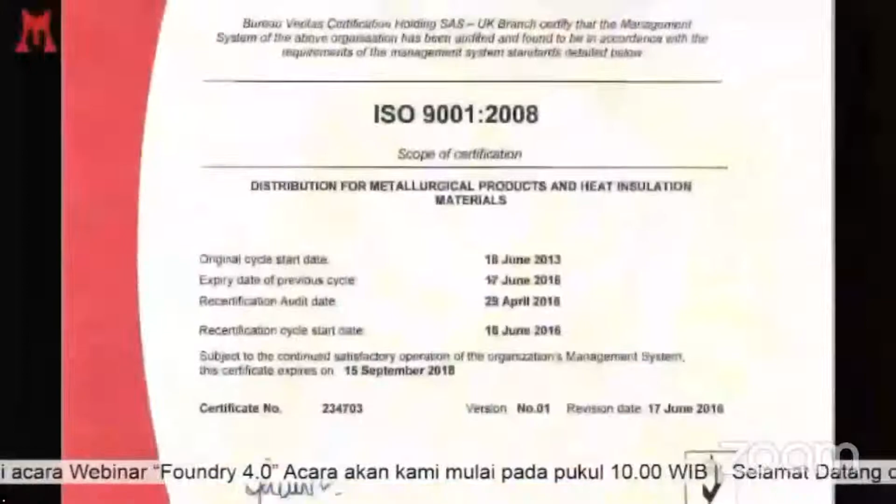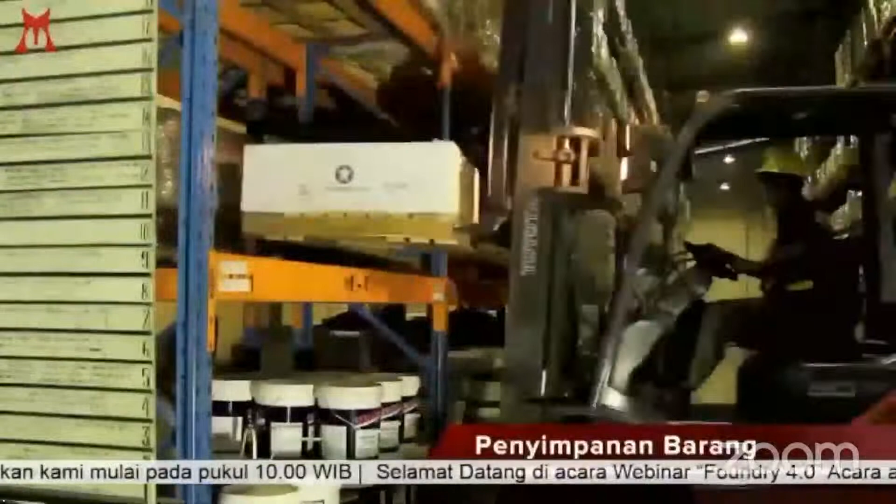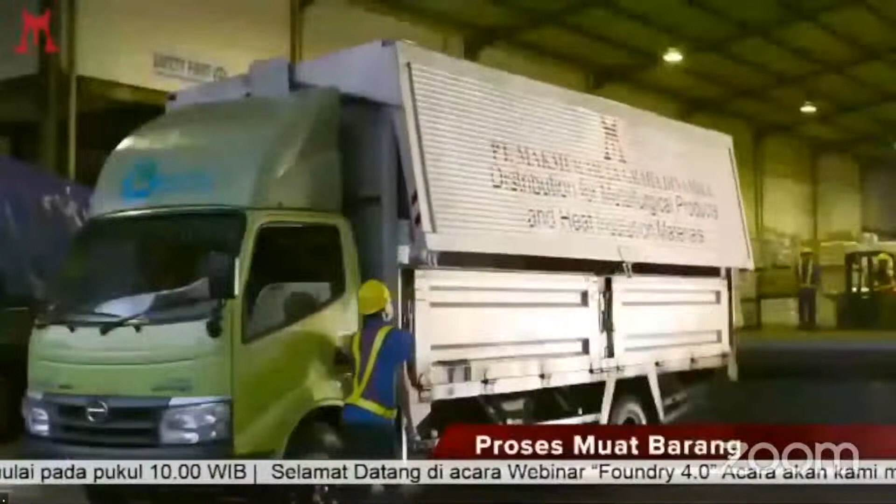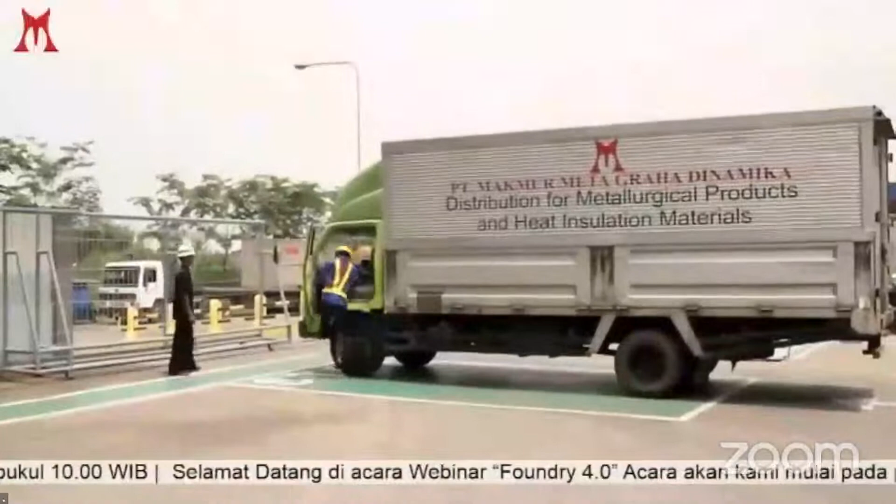PT Makmur Meta Graha Dinamika adalah perusahaan distribusi produk-produk metalurgi dan material tahan panas terkemuka di Indonesia. Sistem manajemen logistik terintegrasi untuk menjamin pelayanan terbaik kepada pelanggan. Kami selalu siap menjaga kepercayaan Anda.

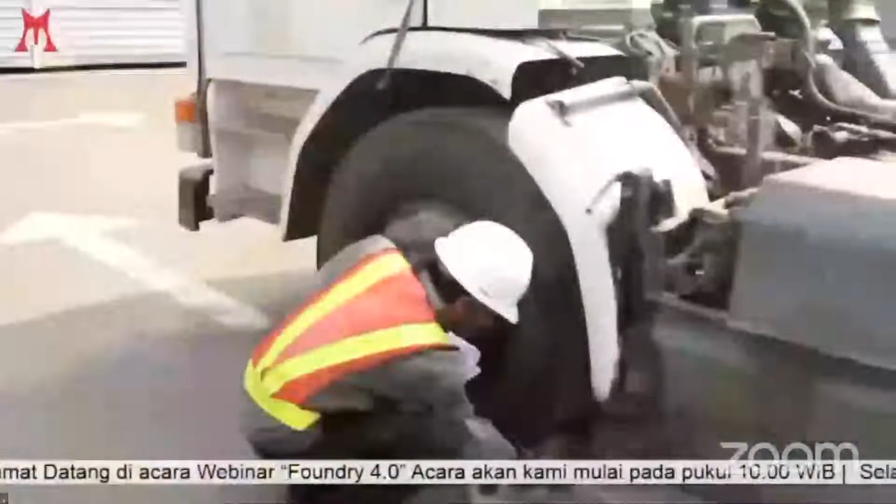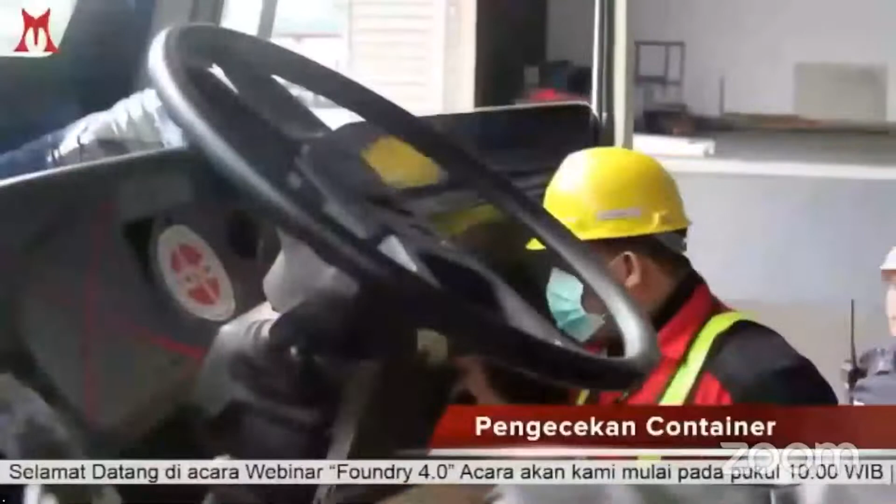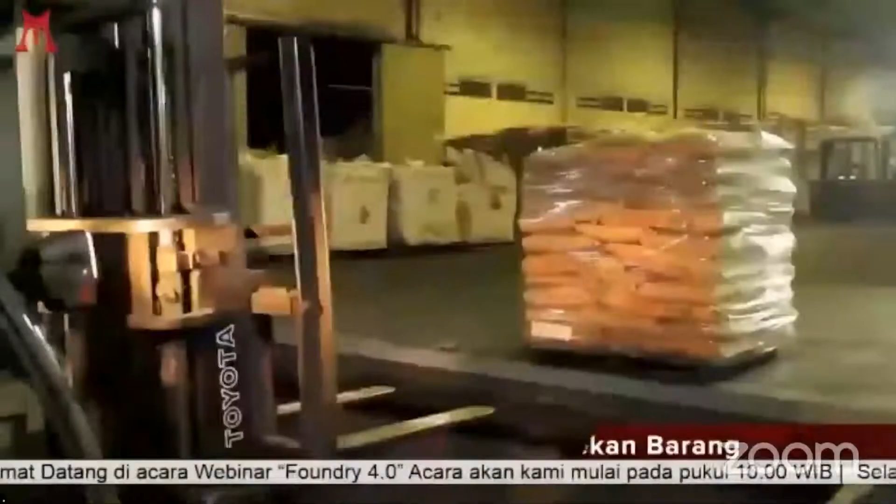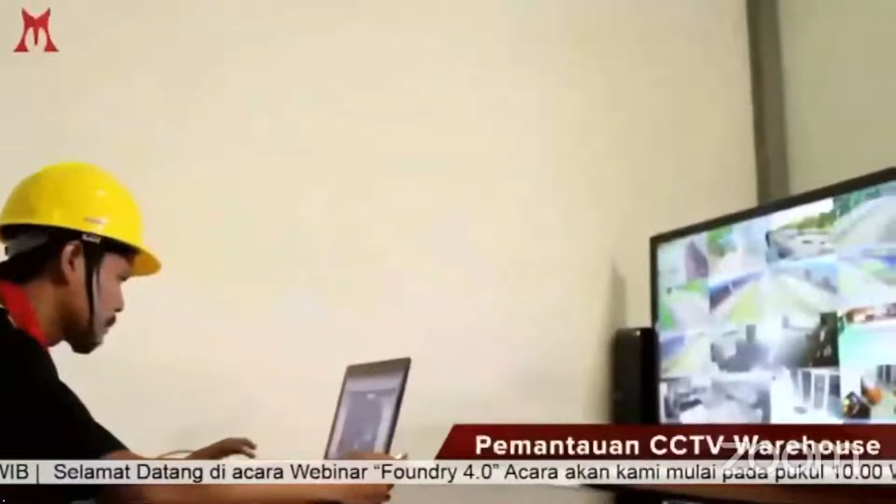Makmur Meta Graha Dinamika adalah perusahaan distribusi produk-produk metalurgi dan material tahan panas terkemuka di Indonesia. Sistem manajemen logistik terintegrasi untuk menjamin pelayanan terbaik kepada pelanggan. Kami selalu siap menjaga kepercayaan Anda.

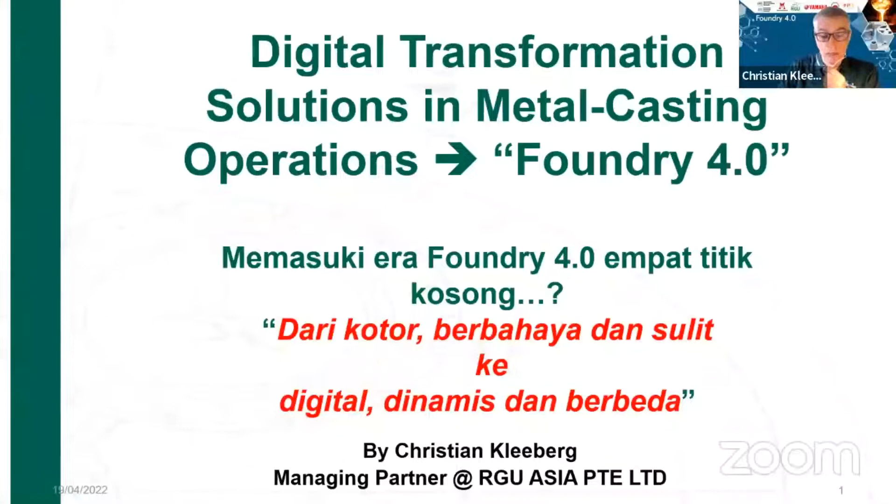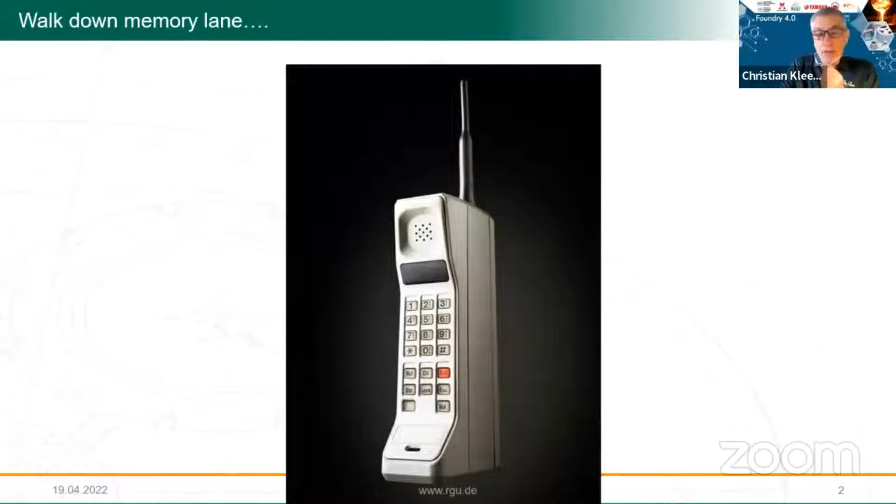It has to do with a very important keyword: innovation.

And innovation means also in Foundry what we are talking about on 4.0. Now, the topic of today was metal casting 4.0 innovation via digitalization. And it's extremely important that I'm in a position to show you what is that, why should I do this, how do I do it, when and where do I start, who can help, what misconceptions prevail.

A quick one about myself, Christian Kleeberg. I'm 58, married, have 2 children. I'm since 2015-16 independent expert in digital transformation, have more than 27 years of experience in this one. We have our own company and we are the exclusive digital solution provider only for Foundry. So we really focus on this area very much exclusively.

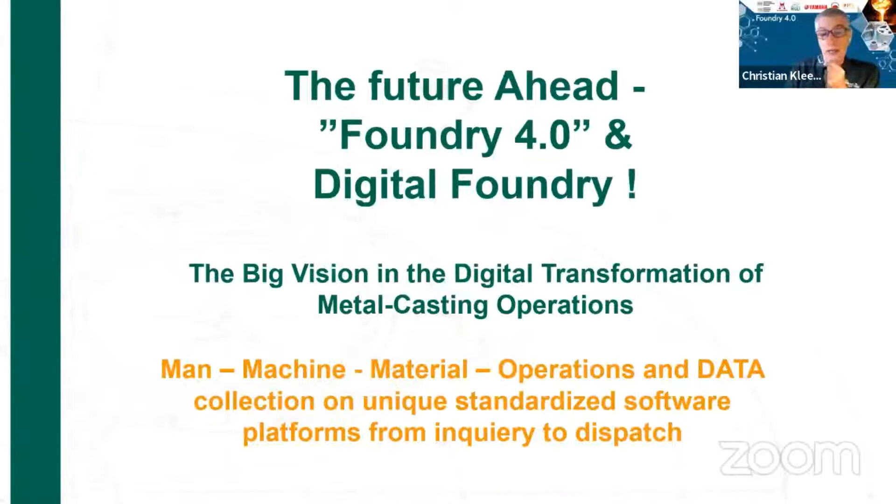Now, let us go now into the metal casting industry, understanding what Foundry 4.0 actually means, digital foundry, what's the vision, how do we bring man, machine, material, operations, and data into standardized software platforms, and how do we look at it from a holistic point of view. So it's about understanding 4.0 for metal casting operations.

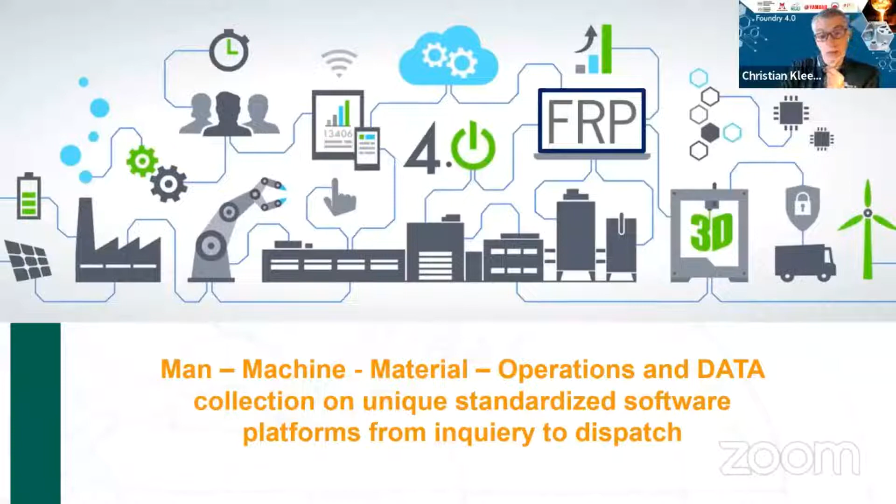Yeah, a quick one about our company actually. RGU Asia Pacific is operating since January 2017, and we have become the leading supplier of digital solutions for metal casting operations for foundry, but also for heat treatment and steel mills and aluminium smelters. And we are a joint venture between the RGU Germany and our Singapore organization. And we have our own company in India itself. And we have about 85 specialists globally and more than 320 installations and projects done already. And we have distinguished partners, especially in Indonesia, Makmur Meta Graha Dinamika.

Pak Andre will be happy to support you. Many customers of ours, from very, very small to very, very large.

So it's not about the size that matters, it's about a digital mindset that matters. And let me explain why. We have in Asia Pacific, since January 2017, already acquired 18 clients. And that's a very good success rate, I must say, because it takes time to implement technology on the 4.0 level.

As I mentioned earlier, digital solutions for the heavy industry: casting, forging, steel mills. It's about production, it's about planning, it's about controlling, it's about sourcing, it's about big data. And it's about understanding how new technologies on the 4.0 level can be integrated in an environment that can be hostile. That's the major objective we have to understand, and that's what we're going to talk about today.

Because we will have a lot of challenges to overcome, and these challenges are actually difficulty in extracting and transferring the data onto one platform. The challenges are integration of hardware and software between different suppliers. The challenges are the rise of cyber threats, for example ransomware attacks—it's happening already. The challenges are the speed of how new technologies are emerging. And the challenges are the lack of knowledge of standards.

Let me explain what it actually means between digitization, digitalization, and digital transformation. So digitization is a very simple thing: you change from paper fax to email. Most of you have done that already.

Digitalization means you're using new technologies in a business model, and of course you do things in a different way—for example, digital sourcing or buying. And digital transformation means you are using complete technologies to change your organization, and of course you ban certain things, for example no more Excel files. And that's actually the most difficult thing when you want to change the organizational model.

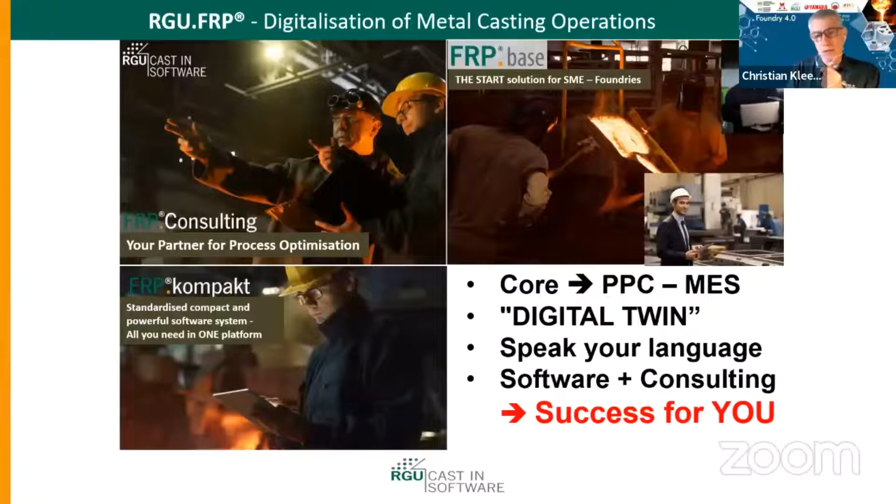Now, another technology—and we'll come back to that one a little bit later—is about our melting shop solution. The melting shop, in any environment we are talking about, foundry, steel, smelters, even heat treatment, is the area where the biggest cost driver is. So the question is always, how can we digitalize that one? Is it possible? Yes, it is possible. And you won't believe how much potential savings are available in that particular area.

Now, having said about digital twin, what is a digital twin when you apply that in a metal casting environment? The digital twin, as per definition, is a virtual representation that serves as the real-time digital counterpart of a physical object or process. Now in metal casting, this is the process from core, mold, melt, pouring, shake out, fettling, machining, heat treatment, packing, until you send out the parts via dispatch.

And of course, there are variations—different processes mean different areas. And all these things can be digitally replicated. We call that a resource plan inside our bespoke FRP software platform.

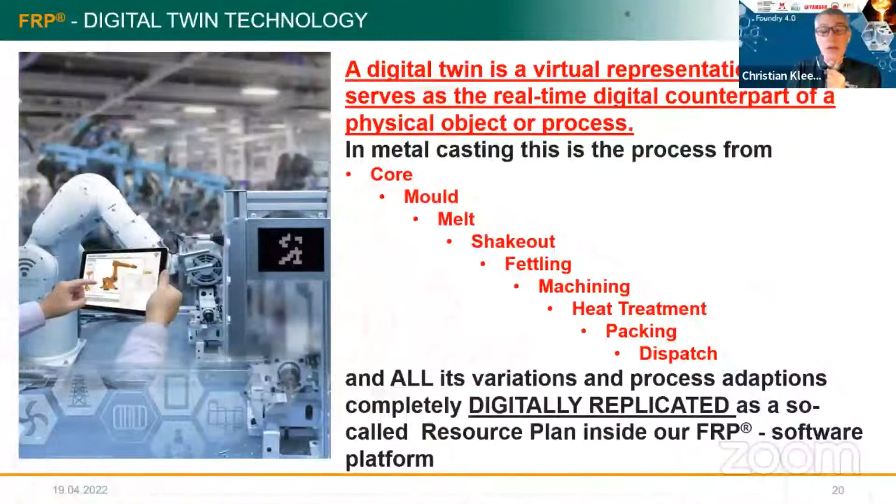When we can establish this information, we can use it for lots of good things inside an organization, and we can make things transparent. Now, what is a resource plan? It's a combination of a lot of items - the item master, the tools and patterns utilized, the operations, the BOMs, and ultimately, as a byproduct, the understanding of how much it costs to make a part. And that is a very important aspect. This resource plan technology, this digital twin technology, is applicable throughout the whole operation of a metal casting environment.

We of course use this information especially for the visualization of KPIs. And this is something I must admit I don't see much in foundries today. Foundries do not think about their KPIs. They do not see what happens in the near future, in the next 2, 3, 5 weeks. There's technology available that allows them to see these items and move to the future - for example, understanding 3 weeks down the road, do I have a problem in my fettling shop? Yes or no? Do I have enough resources? Is my capacity overutilized? So understanding these areas means better planning, better optimization, cost savings, higher productivity. And if we deploy such technology, we are on the well-known track of becoming 4.0. It's really one facet of many facets.

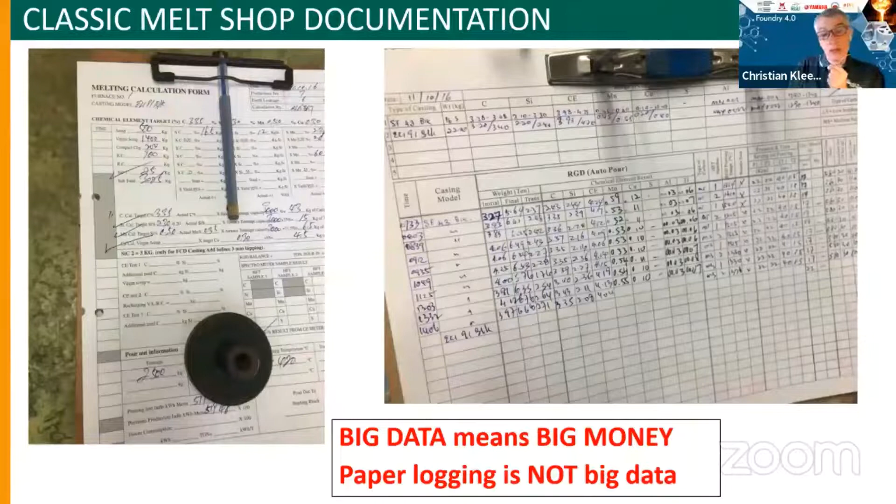How do we change this towards a digital operation? That is something I would love the most. 'We have an ERP system, means we are digital' - that's, in my view, the number one classic misconception.

Shop floor is many times neglected. There's no integration done. What you cannot measure, you cannot control - very simple. And if Excel prevails, you are just not digital at all. Period. Live with it. That's what we have to really learn about.

Now understanding this means understanding workflows. Workflows means you have sales offer, we have a resource plan, we need cost calculation, we have tool and pattern management, we need to book orders, we do production scheduling, we need to understand from the shop floor what happens. Ultimately we need to display the data, we do quality tests, shipping orders, invoices, and certificates until we ship the item.

And understanding this means we understand the company processes, we understand the feedback stations, we understand what overview is required. We want to make the foundry and metal casting environment systematic and ultimately resulting in better quality at work and business. So this is very, very important, because without that one, we are not able to structure the Foundry 4.0 activities.

Now a foundry may look like this. For example, you have a molding line, you have a melt shop, you have a pattern area, you have a core shop, and there may be some other subsequent machining and cleaning and heat treatment and packaging and dispatch activities.

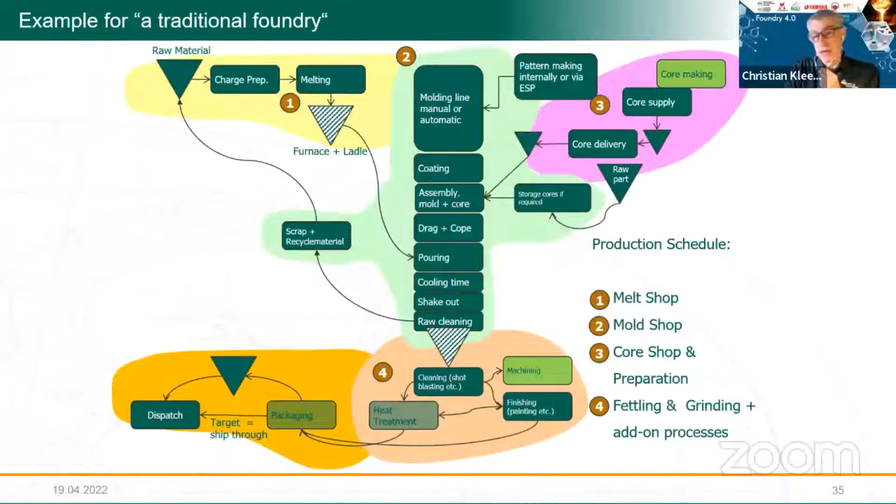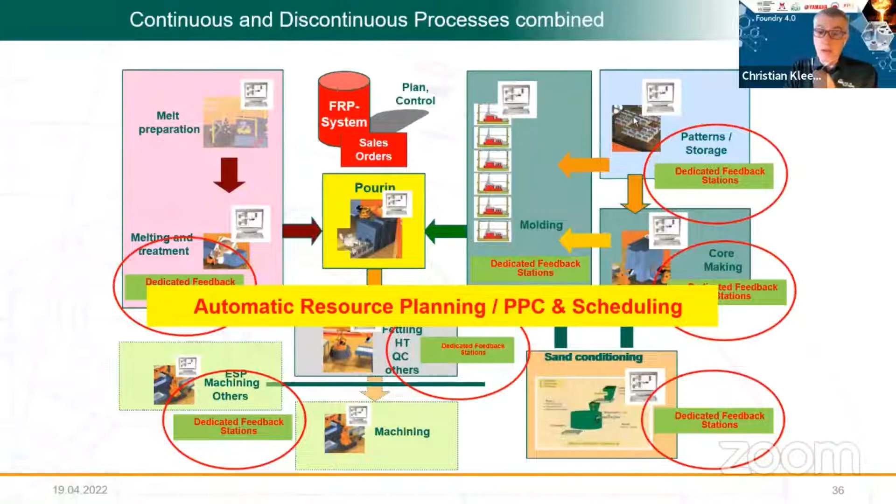Now a foundry can also look like this, structured with a computer in every area where there are what we call dedicated feedback stations. These dedicated feedback stations in a computer are then centrally serving the ERP system. We do an automatic resource planning, which means digital twin deployment and PPC and scheduling, and everything is fully integrated. It is possible, and I will show you in a few examples how it is possible.

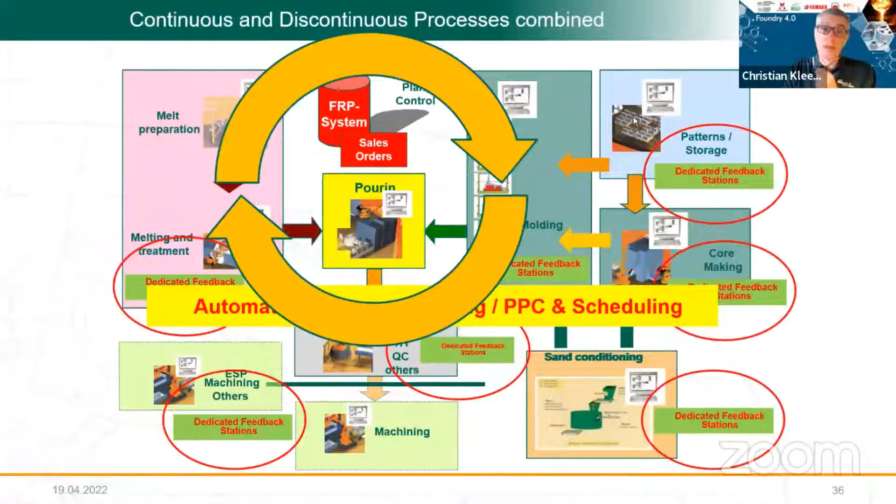Now let's look into these examples right away: digitalization, integration, and automation. I mentioned that already. What is it? Where do I start? What can I do? And why should I do it? That's maybe the even more important question - why should we do that?

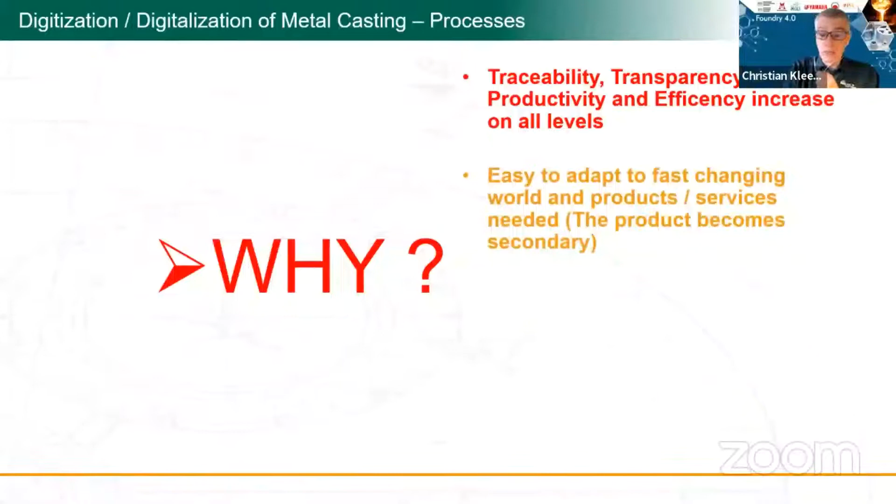Number one, we talk about traceability, transparency, productivity, and efficiency. We need to increase that. We talk about easy to adapt, fast changing world - the IT world is changing almost daily. We need, of course, to look into the profit margins when costings are involved. And we have to stay competitive with less waste. So that's a major reason why this is such an important topic in today's manufacturing environment.

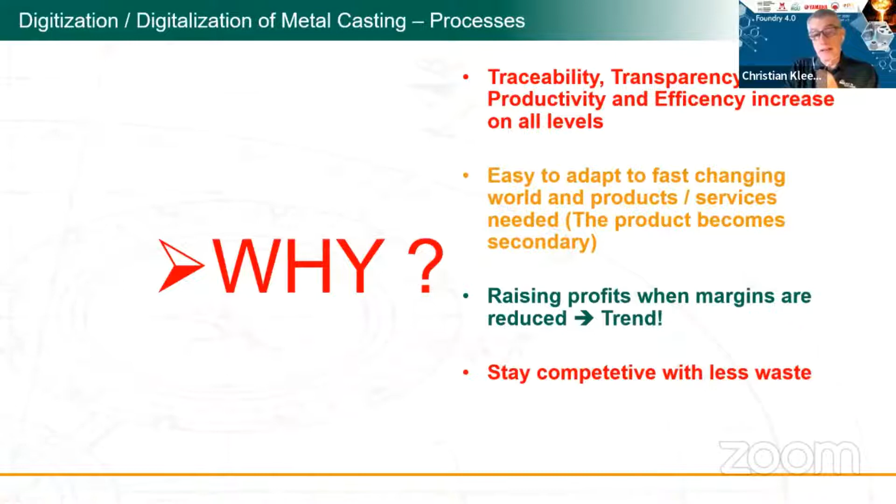Ultimately, we want to eliminate inefficiencies. And we have to also understand Foundry 4.0 is new and uncharted territory for every foundry. So innovation is important. We have to understand there are no standards or standard solutions, no blueprints. Again, innovation is important. We have to also understand that different processes, organization, setup require multiple and flexible approaches. Again, innovation is important, and there is no value of experience. You cannot buy 4.0 in one box - not possible. So innovation is important, and we have to also understand it's new, no matter what you do.

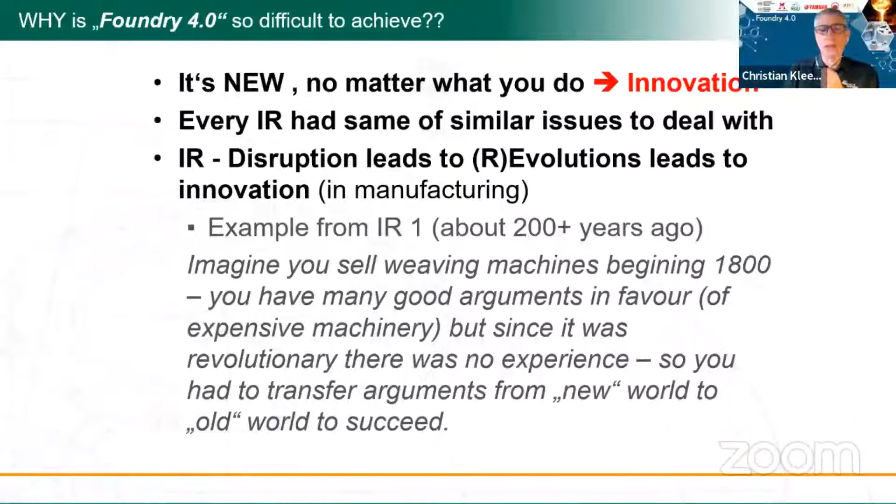And every industrial revolution has its own difficulties and, of course, its own prevailing ideas and innovation areas. Remember, we mentioned industrial revolution number one - imagine 200 years ago, somebody was talking about, we had a manual weaving loom, buy an electric weaving loom. Nobody would buy that. So again, it's the same thing. In metal casting, we are very traditional. We have to overcome these traditions and move things to new areas.

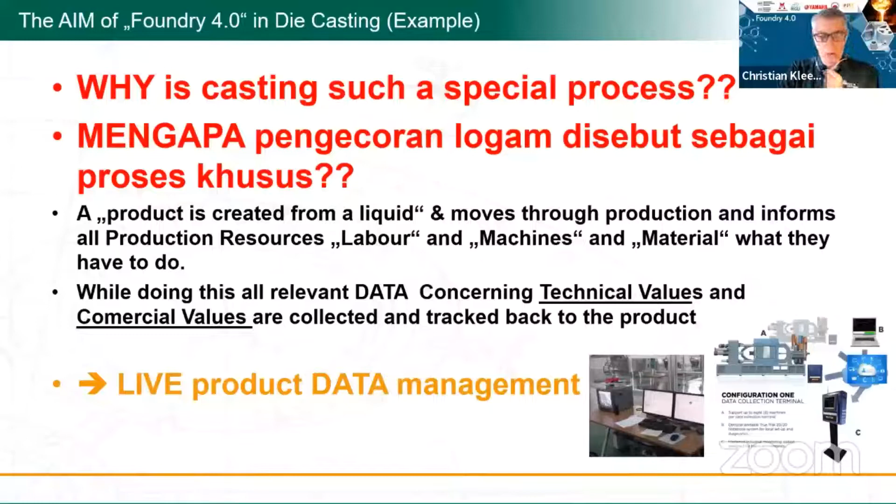That is why the casting is such a special process. And when we do this kind of moving across the line of all the areas, then of course the part is collecting data, and these technical values and commercial values are collected and tracked back to the product. That is actually what Industry and Foundry 4.0 is all about - it's about live product data management. The question is, can you do it? Do you have the means to do that? Of course, it requires understanding, it requires software, it requires a lot of other areas.

And yeah, it's about, again, the data and the requirements for the foundry. So we have to put things on common platforms. And that's the idea - database, data analytics, data visualization, and so on, so that you can make data-driven decisions.

That is the idea here, we have understood it. Now we go into real life examples existing in the foundry.

A very smart solution, works fantastically well, used by one of our customers in Europe. All the process data of the mold is stored in a database, so later you can enable retrospective analysis of faults. So we're talking about real learning, process control, and of course saving money accordingly.

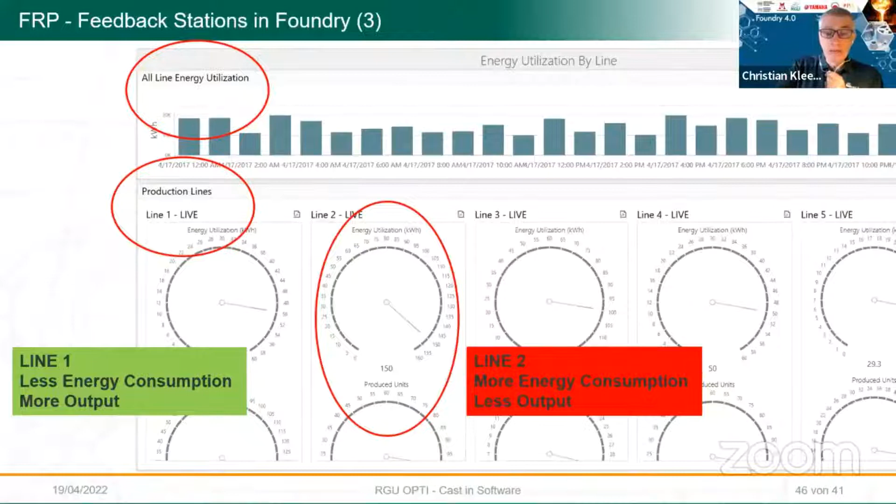Another example is about understanding OEE. What is that all about? It means knowing what availability, performance, and quality a casting machine has, or understanding different production lines. For example, line 1 has less energy consumption and more output, while line 2 has more energy consumption and less output. Why is that so? It's about the data these production lines produce.

It could also be understanding raw materials. Right now we are in a situation where raw materials are shooting through the roof, certain raw materials are extremely expensive, and foundries are complaining left, right, and center. When we know this, we have to apply data analytics. We can use the raw material scenario manager, look back at the last 3 years to see what trends have happened and what trend we have right now, and immediately extrapolate that into the future. We can predict if the raw material trend continues, we'll know precisely when our pricing is no longer adequate, so we can adapt to that.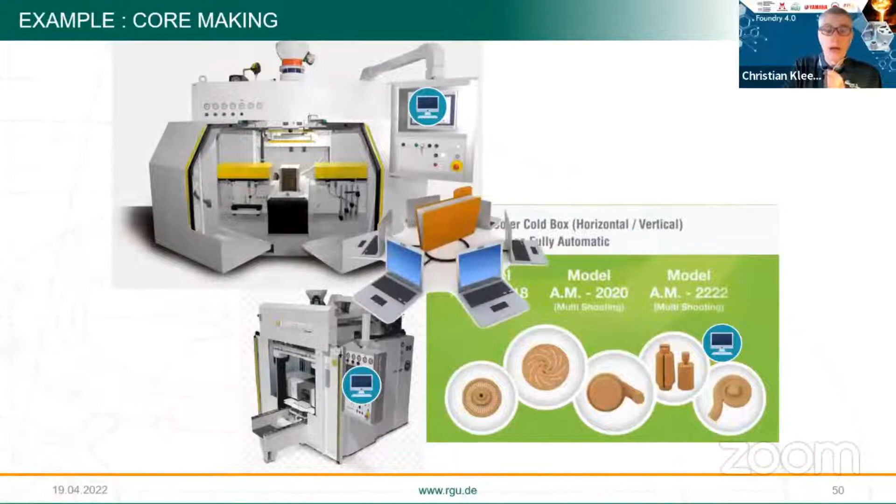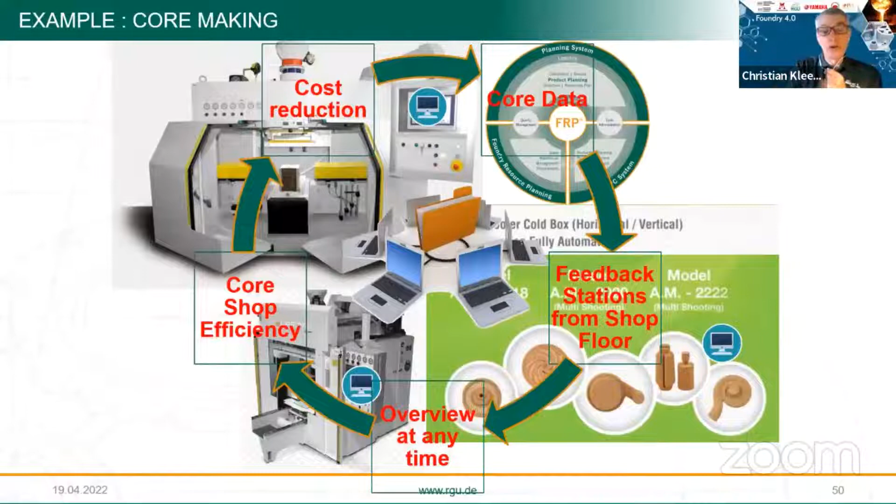Or we look into core shops, connecting the core shop digitally to the software, making sure everything is enabled and understood in the core data collected, so you have the core data itself, the feedback stations, the overview, and you can look into core shop efficiency and then deploy cost reduction items.

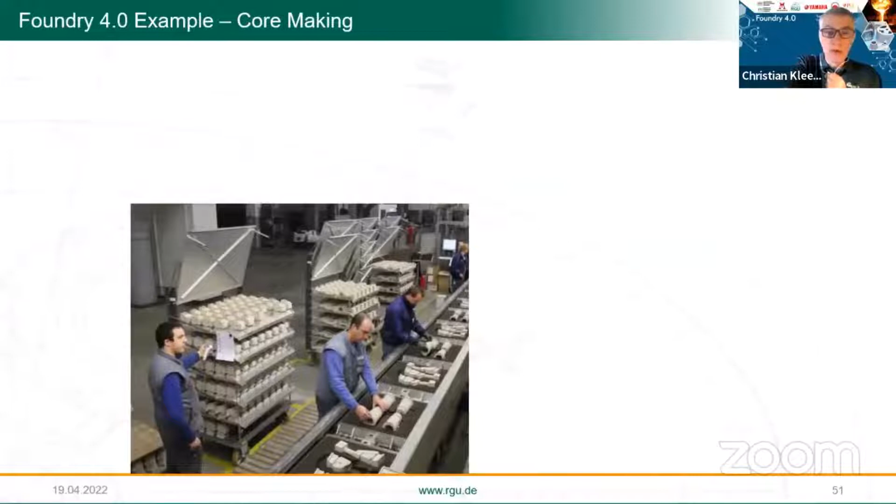Another example, here you can see the guys put the cores manually into the mold. Nothing else we can do right now, but look at it carefully. The core trays each have a barcode attached to them, so you have 1 through 7 core trays and 1 through 7 barcodes. The guy is scanning every time he touches a core. The core is linked to the mold, and the system knows precisely what happens. What do we do here? We tag all the cores and track everything in the system.

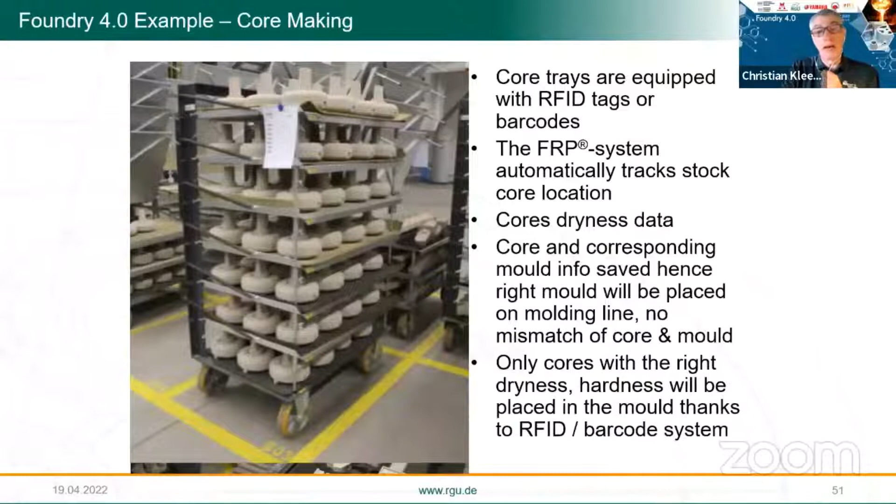We understand the dryness of the cores. The core and corresponding mold data is being saved, and ultimately only the cores with the right dryness and right hardness are placed in the mold, thanks to the RFID and barcode system. So there is never a wrong core in the mold, and that ensures quality to the highest standards. Or here, a feedback station.

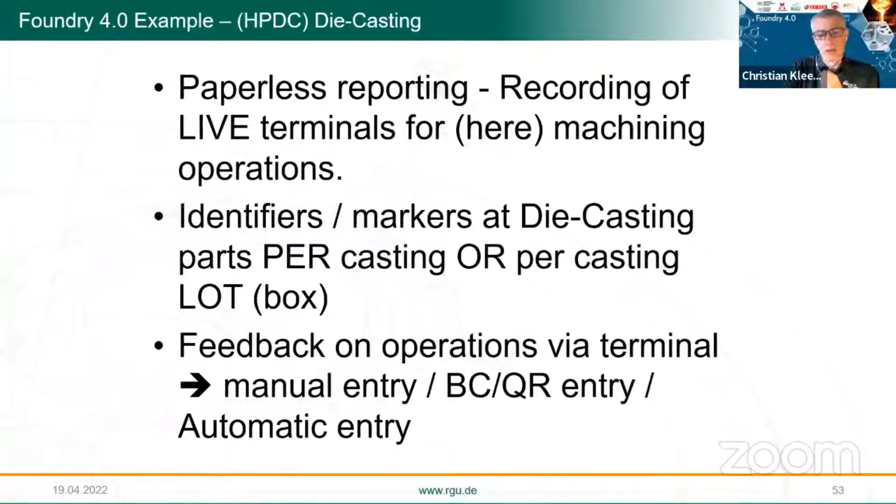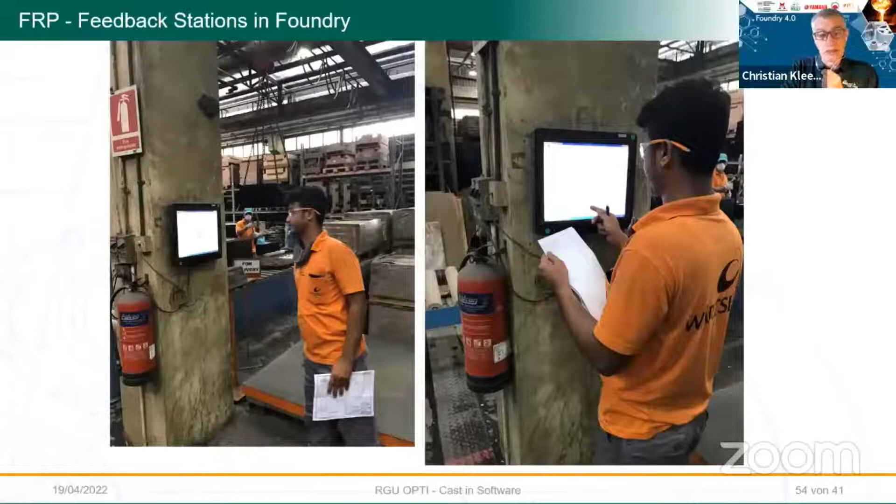This is another customer of ours in Singapore as well. Unfortunately, the foundry has closed down this year, so this is a little bit an obsolete picture, but never mind. When they were operating, that's what they were doing. It's a foundry, and the worker is feeding back with a touch screen straight into the FRP system what they were doing. So it was a direct understanding of what happened every time, any day of the operation. And that transparency was absolutely priceless.

It requires, of course, a digital mindset, and I think I have to say that one more time with a strong emphasis. Challenges for the foundry industry and moving to Foundry 4.0 means you have to adapt your mindset. And Industry 4.0, as I mentioned, is not a product, it's a solution with many, many facets. And in a metal casting environment, there are many areas we can look at.

Here's an example, a couple of slides from one of our customers in India. Uno Minda is a die casting operation, so it's something slightly different, but they work in a very new environment. For example, they have changed the complete data traction and data recording from a traditional way, as you can see on the left-hand side, to a very modern way with direct monitoring inputs, and they are able to check everything in their own language. So it's possible, not an issue at all.

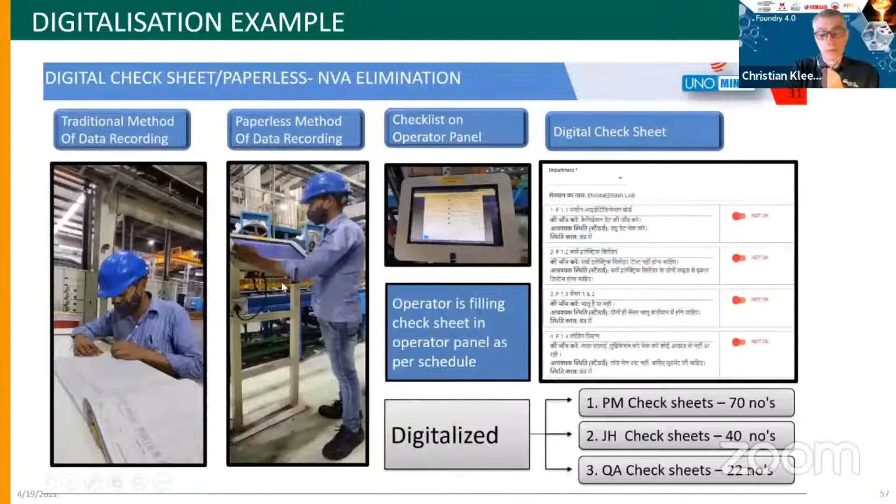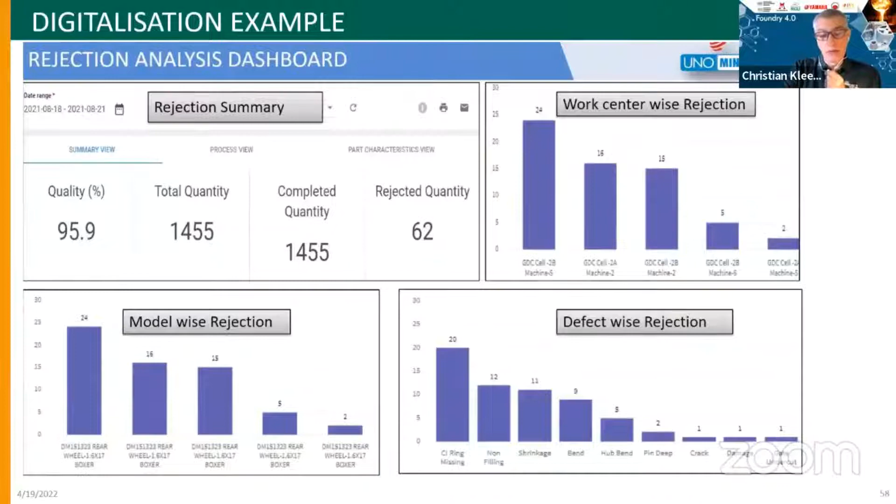And for example, they also have their furnaces digitally connected, so the furnace parameters are being directly monitored to make sure that the furnaces work in an optimal bandwidth. This is very important in aluminium, because if the temperature drops too much, the castings get bad. So this is also very important.

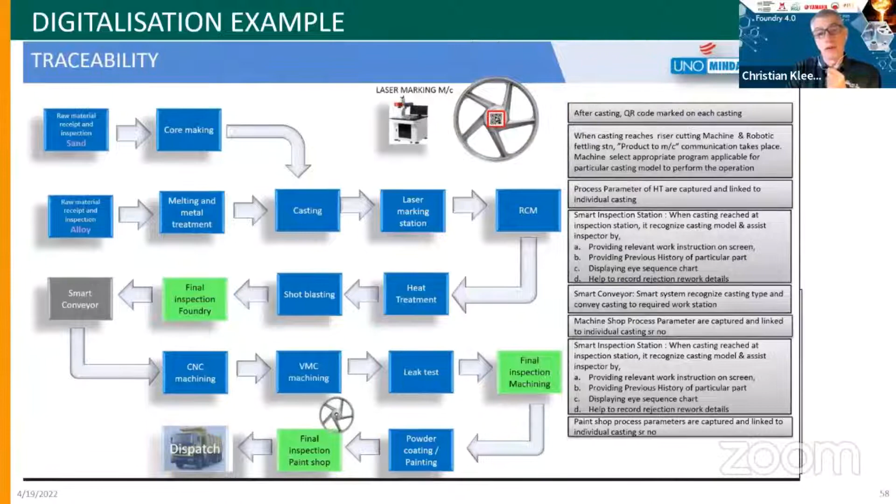Or, and this is the latest we are doing right now, they are tracking and tracing each individual part. So every wheel, every part they make receives a QR code, and with the QR code they are able to track and trace every part at its individual station. It's still an ongoing project because we are not there yet, but already very strongly in the making. So traceability is an issue.

Or a digital understanding of a part inspection station, so that you know precisely what defect type has been created. And these defects are then categorized and monitored, and later analyzed to understand what is happening on the shop floor.

Last but not least, and this is the future happening today, having a manufacturing control tower, a control room where you sit and see the complete operation in all its stages online in real time. This is the future of metal casting operation, and this is what every foundry should have, so that you understand what we are actually doing in reality, and comparing always the planning with the actual.

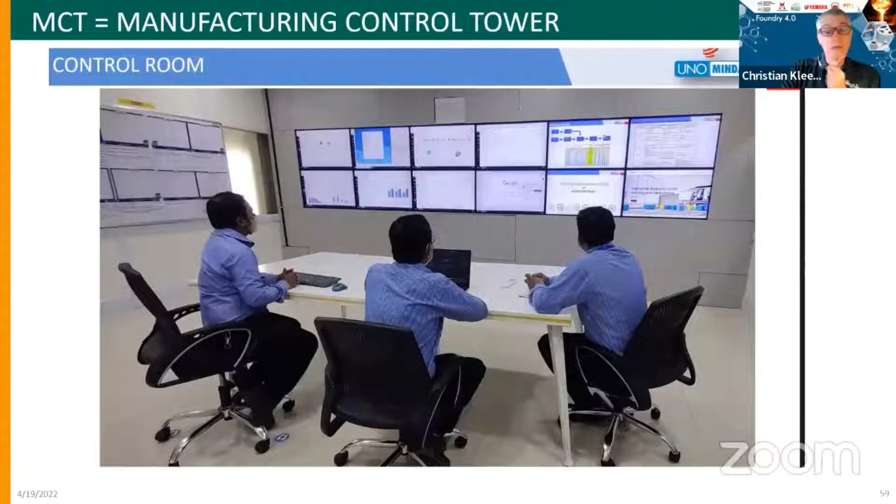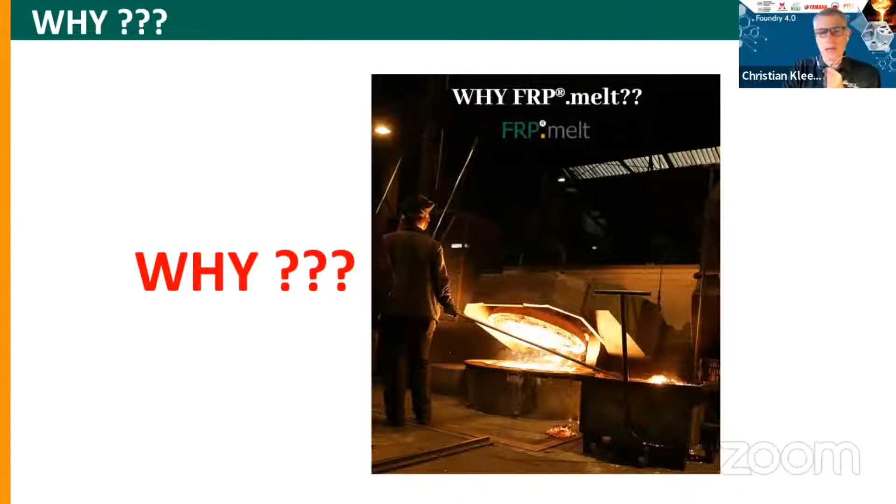I mentioned earlier, and I'm coming almost to the end of my presentation, what about melting? Melting is something we always emphasize should be digitally controlled. The question is again, why should we do that? And here again, the melt shop is the least explored digital area in every metal casting environment. And we always say big data means big money. So the question is, what can I improve?

Of course, you need big data. How efficient is the process? Of course, you need big data. And it goes on and on. So what happens if a reject charge is created? Or every time I do a heat, every time I do a melt, do I receive exactly what I want? Again, it requires big data. And you saw that a minute ago, I'm repeating it: manual control, paper control, or paper logging, that is not big data at all.

The foundry where I collected these sheets, I asked them: what do you have? What happens with these paper logs? And they say, nothing. And I say, exactly, nothing. So if you don't harvest the data, you will not utilize it, you will not improve.

We have to put things into platforms, into databases, and that's exactly the point. In melting, it's calculating the end result faster, meaning time savings. It's securing better melt quality, less material. It ensures the melt recipe is preserved, consistency. And ultimately, even what-if scenarios become possible, material improvement.

And all this and much, much more leads to these famous dollar and monetary improvements. That is not science fiction. Let me give you an example from a German foundry. They have deployed our melt system, and over a period of time they were able to bring power costs down by 21%. I would say that is pretty significant, because when you can reduce your power consumption today, that has a direct impact on the environment, on your CO2 footprint, and many, many others.

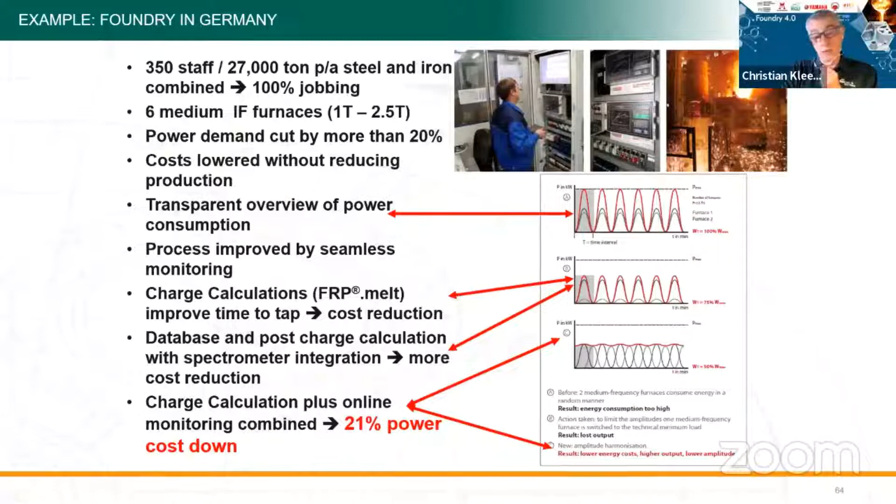So there you are. And that's why digitalization in melting is just as important as the rest of all the operations. Coming back to Foundry 4.0, automation, let us understand what is really important.

Apparently, the digital twin in metal casting production works. The digital twin we can absolutely deploy. Knowing where a part comes from means traceability. Knowing where it is means transparency. Knowing where it goes to means trackability. And knowing precisely, I repeat the word precisely, how much it costs to make it is absolutely priceless.

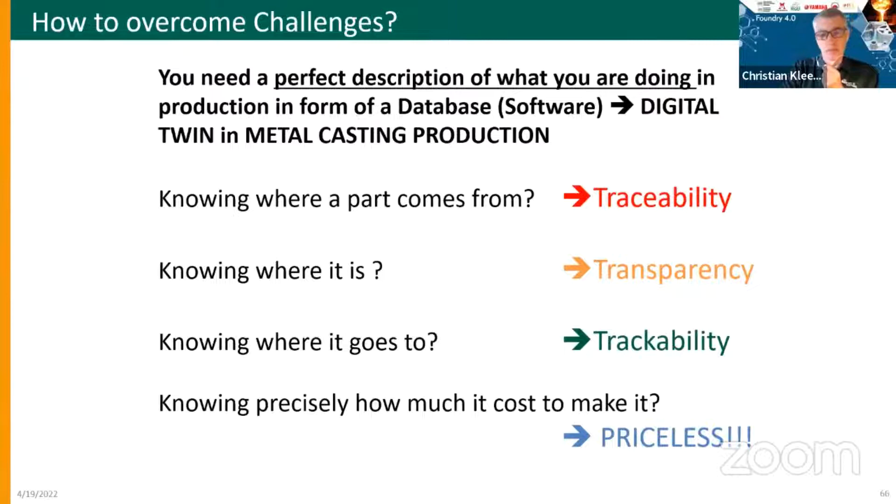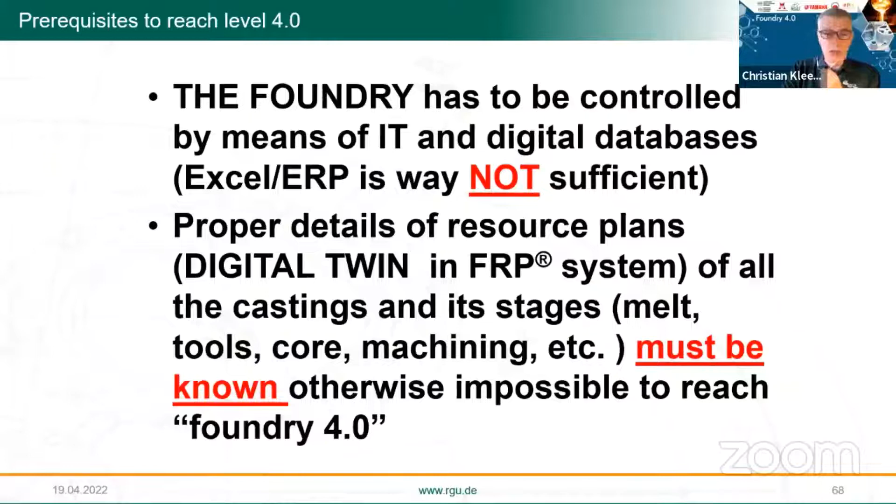Now, we mentioned that already. It's about manufacturing control towers, overviews, automation, and data collection, making sure this data is in the correct environment. It's important that the foundry be controlled by means of IT and digital databases. Excel and ERP alone are not sufficient. Proper resource plans, meaning a digital twin, for example in an FRP system, of all the casting stages—melt, tools, core, machining—must be known.

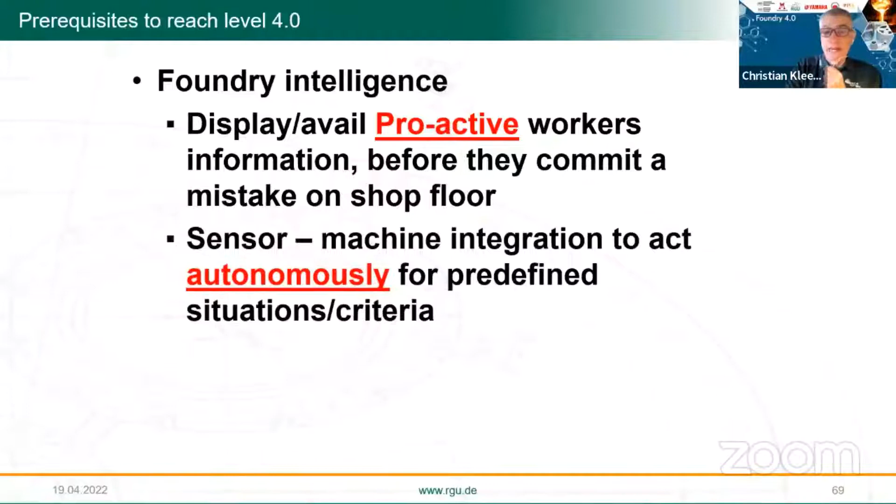Otherwise it's impossible to reach Foundry 4.0 levels. We have to make sure foundry intelligence is deployed: displaying availability, proactive worker information before they commit a mistake on the shop floor. We have shown you what works—sensor and machine integration to act autonomously for predefined situations and criteria. And ultimately, real-time foundry data availability on mobile, tablet, laptop, for better traceability, quick decisions, avoiding damages and rejections.

That is absolutely paramount. Foundries today are still very much manual, very analog, lots of paper, and very, very slow. Look into your own operations and you will understand what I'm talking about. Not everybody is as sophisticated as our friends here at Uno Minda in India.

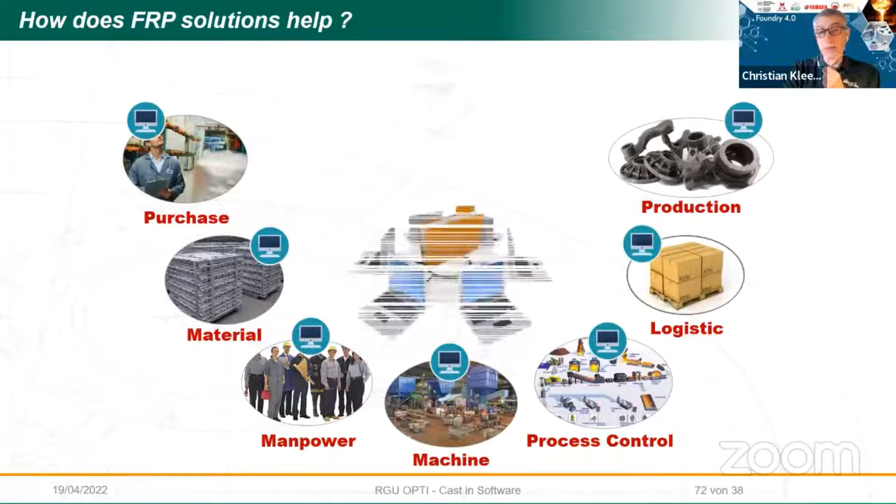So how does FRP work? It's all about integration of all the areas, understanding all the computerization items, making sure everything is interconnected on one common platform, and ensuring that you have everything in a software system. You work digitally enhanced, of course.

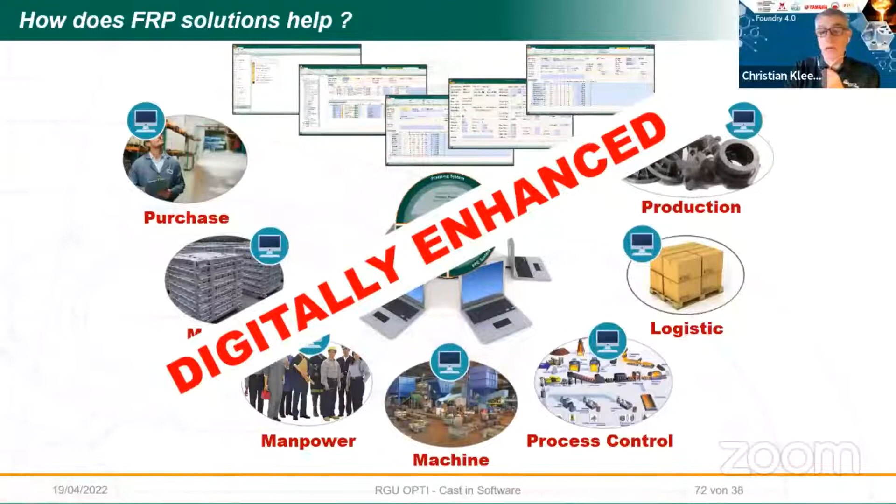At the end of the day, it's about understanding: when the customer calls asking where are my parts, you can just look up the system, have a look at it, and tell them they're on the way because we are on track. So this is the easy way of doing it. But to get there is not that easy, though it is possible. It's about understanding how we move forward, working digitally enhanced.

Last but not least, how much does it cost to become Foundry 4.0? Let me give you the answer in one minute's time.

Before we do that, let me summarize once more about Industry 4.0 in Indonesia. Indonesia is on the right track. As you can see here, this is from 2019—I have no charts from 2020 and 2021, apparently due to the COVID situation, but it can be updated. Indonesia has identified clear targets, and these targets are available; you can go to the Ministry of Industry and they have that available. You can look into those targets and see what we can do in the next steps. Indonesia has identified 5 industrial sectors, and these sectors are very, very important to the country. We understand that, we support that.

Absolutely, Foundry is a supporting sector, that's why Foundry is important as well. Indonesia has also created very clear 6 steps of making Indonesia 4.0 in terms of implementation. This is also an area that has already been identified, so there's nothing new we need to do. Follow this plan, and I believe Indonesia will become 4.0 sooner than later.

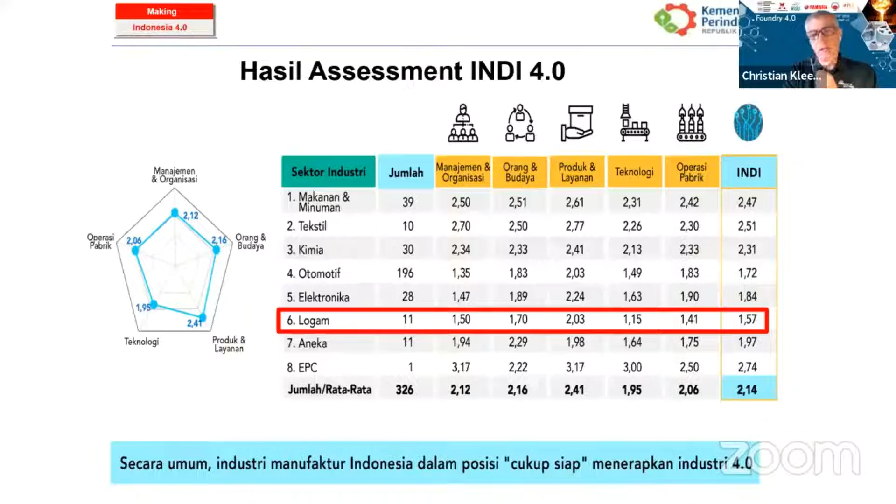Here we have a clear understanding that the metal casting industry is part of this, and that means we automatically have to understand where is the metal casting industry. Unfortunately, on a scale between 0 and 3, the metals industry in general has scored the lowest amount of readiness for Industry 4.0 in Indonesia. However, the metal industry has the highest potential to digitalize and bring any country to the 4.0 level, but unfortunately currently has the lowest drive into innovation and digital transformation. So I'm appealing to everybody, if you are in the metal casting industry or the metal industry, look into that one. It is helping the country, it is helping your organization, it's helping yourself to go in the right direction.

Now I come to the question, how much does it cost to do that? Actually the answer is very simple: can you afford not to do it? So any investment into digitalization, any investment into understanding how we can go down the foundry or metal casting 4.0 level, is an investment into your own future. It's an investment into your country. It's an investment into the organization and into a better environment as well as better technology.

Here are, last but not least, our top 10 tips. Don't jump into buying expensive solutions first. Know your people's skill set, limitations, know your current SOP levels, how many do you have. Break down into smaller segments, maybe into a department. Simplify and standardize before you digitalize. Ensure clear linkage between tasks and accountability. Start with smaller sections for a pilot run. Learn from first success cases. Look for good collaboration partners, we volunteer if you want our services. And of course, buying software means nothing without support.

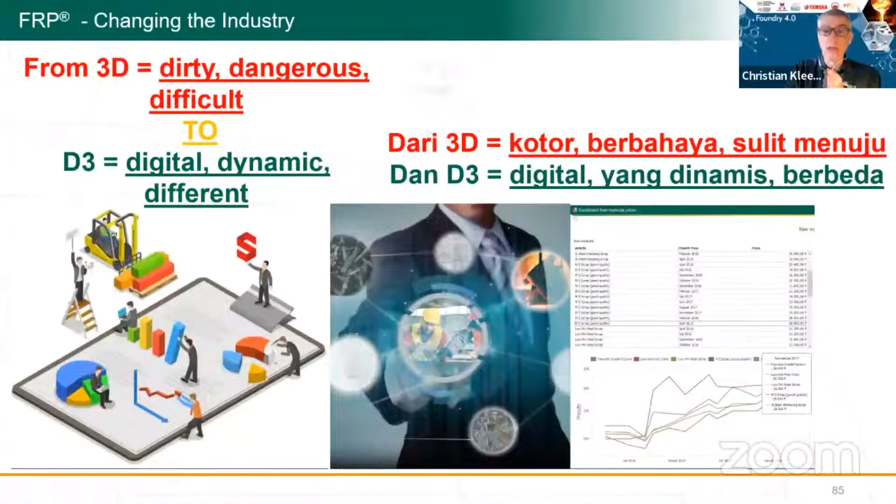Having said that, let me summarize one more time. We have to move the industry from dirty, dangerous, and difficult to digital, dynamic, and different. That's our mission, and that's what we want to do, understanding and looking at Foundry 4.0. If you need more information, have a look at our websites, send me an email, happy to support you, or contact our partner, Makmur Meta Graha Dinamika, Pak Andre. With this, I would like to say terima kasih for your attention and terima kasih for the position to show you about Foundry 4.0. Thank you very much.

Thank you very much, Mr. Christian, that was a wonderful presentation, very clear. I think the conclusion is we can see that the software and platform available from RGU is pretty advanced, which brings me to our question and answer session. The first question I would like to pass on to you is from Mr. Khairun from KUI, Komatsu Undercarriage Indonesia, which has a forging facility. His question is

about IoT. Do you have examples of IoT technology implemented on forging machines? I think this is also part of a personal question I wanted to ask, because I saw in the presentation examples of hardware like biometric cameras implemented by RGU. Is the service from RGU also include turning all these machines into IoT?

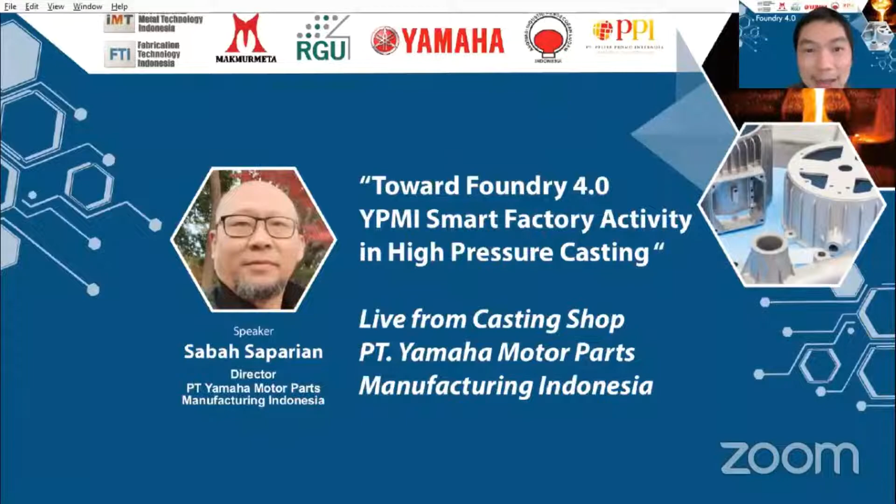Okay, terima kasih. Suara saya terdengar, Pak? Jelas, Pak. Jelas Pak Sabah.